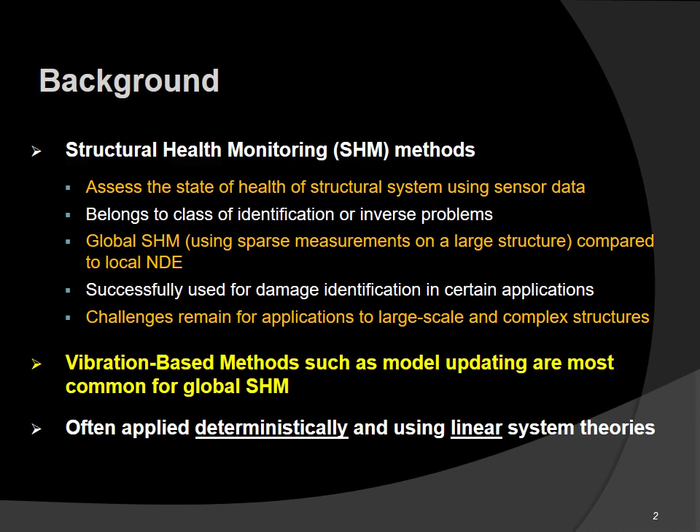One of the more common methods for SHM are vibration-based methods, and among the vibration-based methods, model updating has received more attention in recent years. However, this method is mostly applied in a deterministic manner using linear system theories.

In this presentation, I will give a brief introduction to model updating, and then I will show several applications to large-scale civil structures. Three of them are concrete buildings with masonry infills, and one of them is a footbridge at Tufts campus. The focus here is probabilistic model updating. I will not go over the nonlinear methods or ongoing projects in the interest of time.

The process of structural health monitoring includes collection of data, which is the first step, and we mostly deal with ambient vibration measurements. The second step would be identification, which is an inverse process, which in this case we use model updating. The next step would be performance assessment.

We use the predicted response time history as a metric for assessment of the performance, and we do not go into decision making in this presentation.

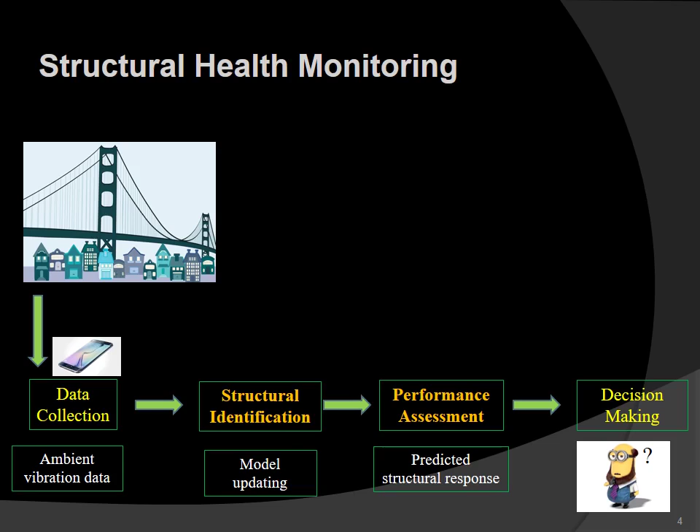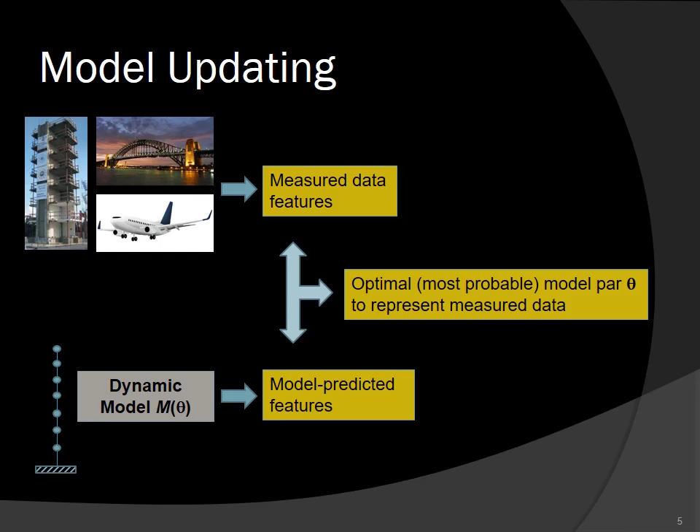Model updating is the process of tuning parameters of model M shown below, so the data from the model match those measured. This can be done through an optimization in a deterministic approach or through sampling in a probabilistic approach.

The challenges for vibration-based methods such as model updating is that they are sensitive to ambient and environmental conditions such as loading and air temperature. Therefore, it's good to have specialized probabilistic methods that can account for these sources of uncertainty explicitly, which is the topic of this presentation.

The other challenge, which we will not address in this presentation, is that most of these methods are linear methods relying on low amplitude vibrations, while some of the changes in dynamic properties may not be visible in the low amplitude vibration data.

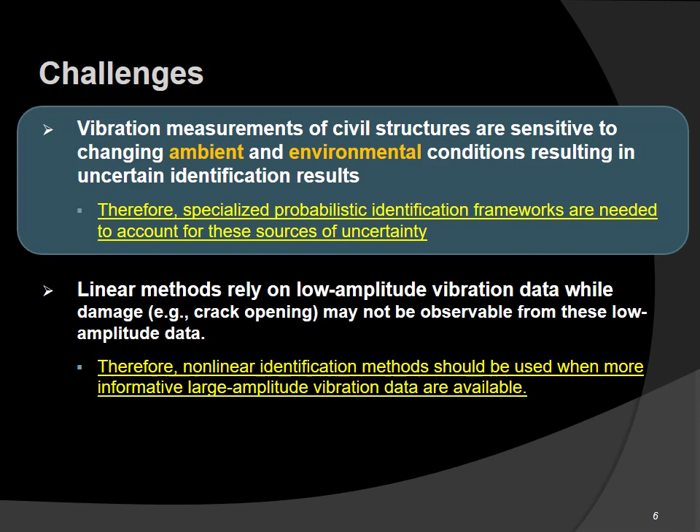The probabilistic methods can be categorized into Bayesian or frequentist approaches. The Bayesian approaches basically measure probability as a degree of belief. They assume that all of the uncertainties are epistemic. When you collect more data, this uncertainty will be reduced.

On the other hand, frequentists consider certain types of uncertainties are very complex and we cannot treat them as epistemic. Therefore, they believe probability measures a proportion of outcomes. The example of flipping a coin is a frequentist approach: you get a bag of coins, you throw the bag on the ground, and count the heads and tails. The Bayesian approach is that you flip a coin, you give me more information about the force that you flip, the ground information, the height, and I can give you more confidence level on the outcome.

The first application I'm going to discuss here is a two-story building in El Centro, California. As you can see in the timeline here, the building went through 4 major earthquakes, and after the last one, it was tagged as unsafe and scheduled for demolition.

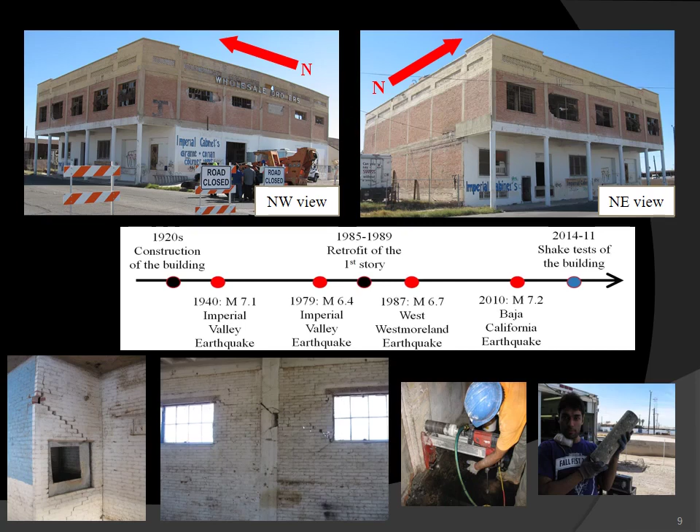Through an NSF grant with my colleague, Professor Stavridis at University at Buffalo, we performed certain tests on this building and collected vibration measurements.

The building was instrumented with triaxial accelerometers. As you can see, there are 5 of those at each floor on the floor plan. We had a shaker at the northwest side, and we also had LiDAR measurements that a colleague from University of Nebraska, Professor Wood, and his team, they collected.

We had more than 8 hours of ambient measurements. What we use here is 300 minutes at the reference state and 107 minutes at the damage states, and we broke it into windows of 10-minute data. So that gives us 30 sets of data for reference and 10 sets of data for the damage state.

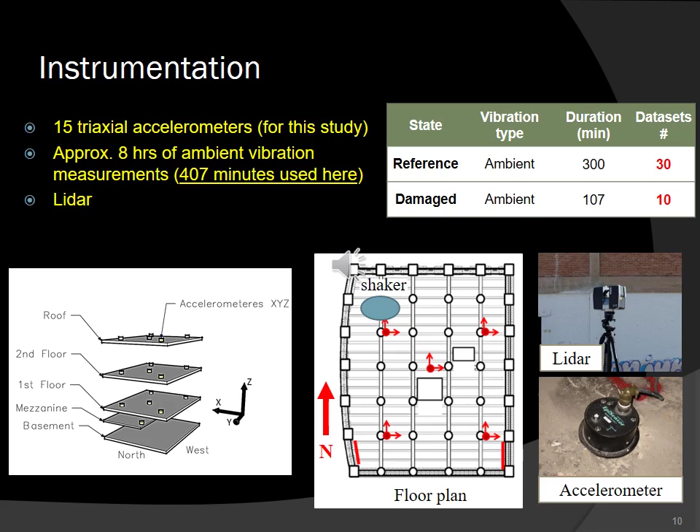But what is the induced damage on the building? The building was already severely damaged, but we're not talking about that damage identification. We can work on that too, but the focus is to be able to estimate the damage that we induced.

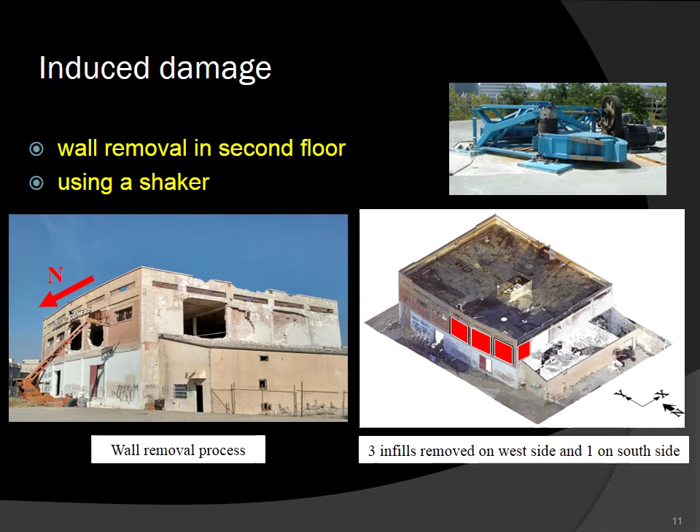In the bottom plot on the right-hand side, there are 4 walls marked with red. Those 4 walls were removed using a forklift, as shown on the left plot. We also used a large shaker, an eccentric mass shaker from NEES at UCLA, that we put on the second floor, northwest side, and the shaking was strong enough to cause some additional damage.

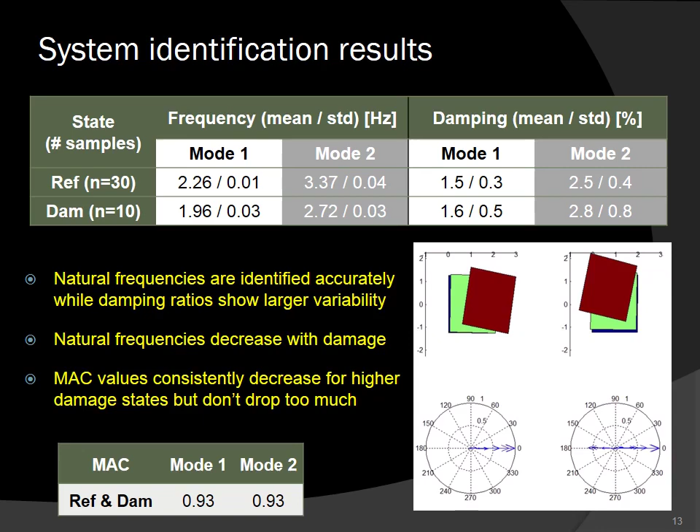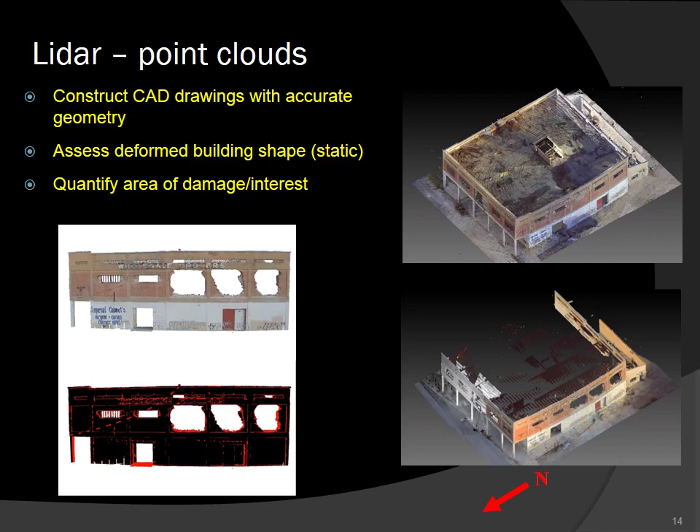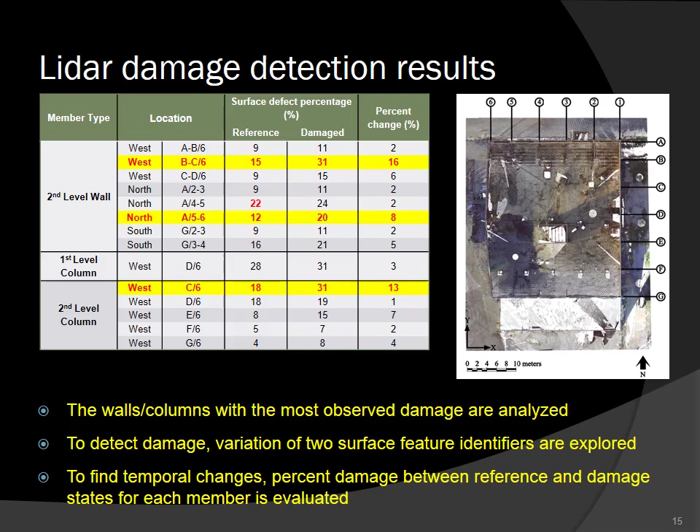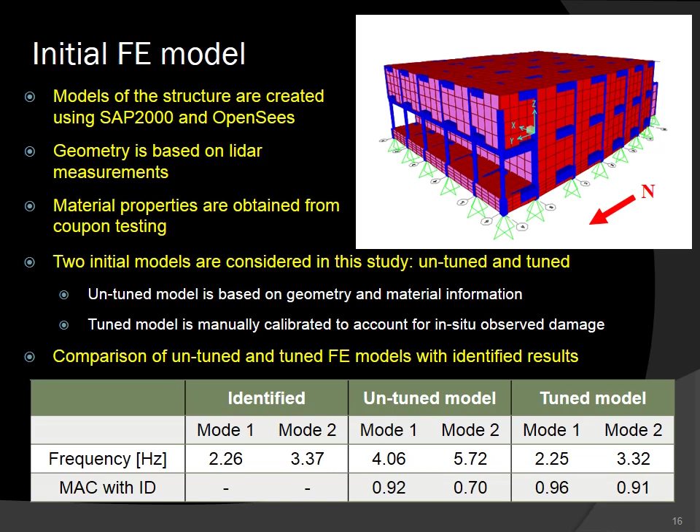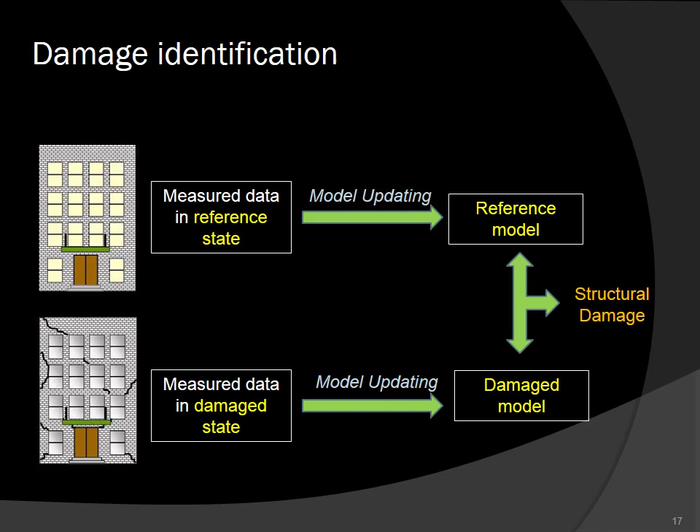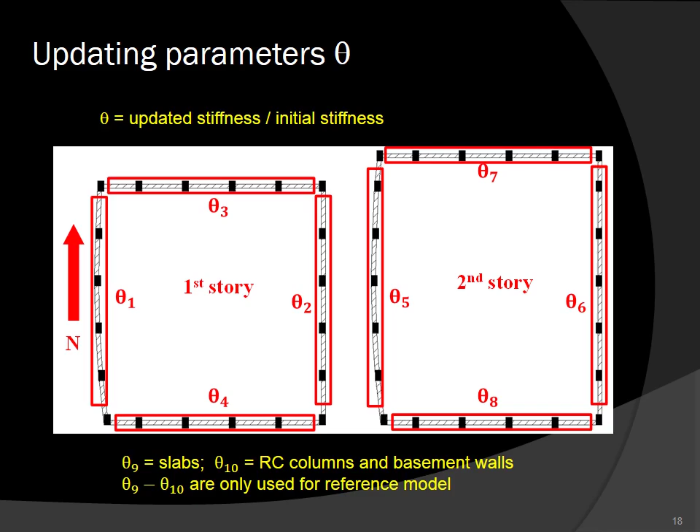In this application, we considered 10 updating parameters, all corresponding to stiffness of different components. The first 4 parameters are stiffness of the exterior walls on the first story, theta 1 being on the west side, 2 on the east side, 3 north, and 4 south. 5 to 8 correspond to similar directions in the second story. 9 and 10 are only used for the reference model and correspond to slabs and RC columns and basement walls, respectively.

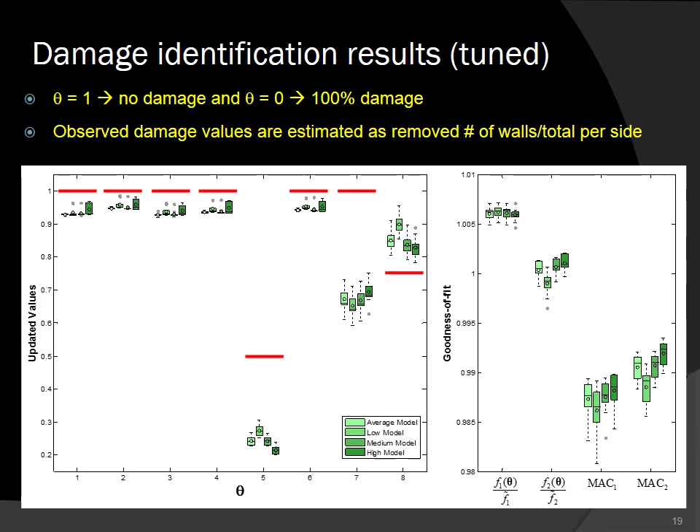5 and 7 correspond to north and west walls, which are exactly closest to the location of the shaker. So the extra damage is induced by the shaker and is consistent with north and west of the second floor, which was observed by LiDAR measurements, showing good consistency between LiDAR and vibration measurements.

In summary, overall, the damage identification results are accurate with small variability and represent the expected damage. There is some overestimation of damage, which we expect to be real and caused by shaking, and this is consistent with LiDAR.

The small variability I mentioned corresponds to the variability across different data sets, which are all ambient vibration. However, if we use forced vibration measurements, the variability would be very significant. So it is recommended that when we use linear model updating, we use similar amplitude data for both reference and damage states.

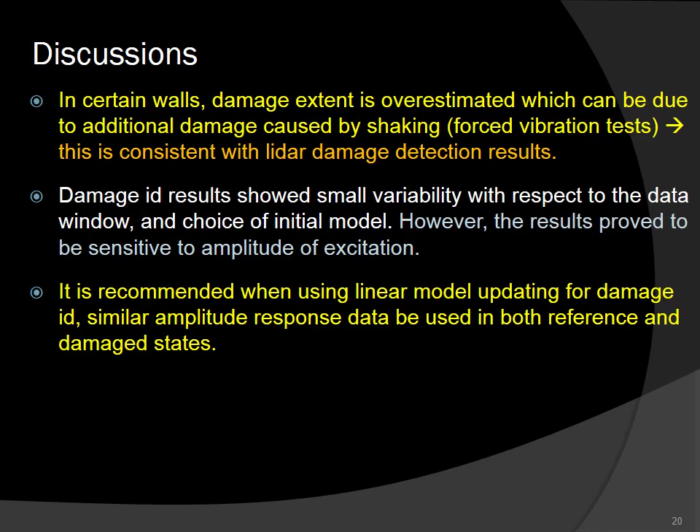The next application is also on a reinforced concrete building with masonry infills. This building is a 4-story school in Nepal, and the measurements are post-Gorkha earthquake.

The main shock of the 2015 Gorkha earthquake happened on April 25 of 2015 with a magnitude of 7.8. The epicenter was close to Kathmandu, the capital of Nepal, and the main shock was followed by 400 aftershocks with magnitude greater than 4.0.

One of these aftershocks was on May 12 with a magnitude of 7.3. The series of main shock and aftershocks caused more than 500,000 buildings to be damaged beyond repair and caused a lot of fatalities and injuries.

Our team visited Nepal in June of 2015, and a couple more visits that I'll focus only on this visit and one school building that I mentioned.

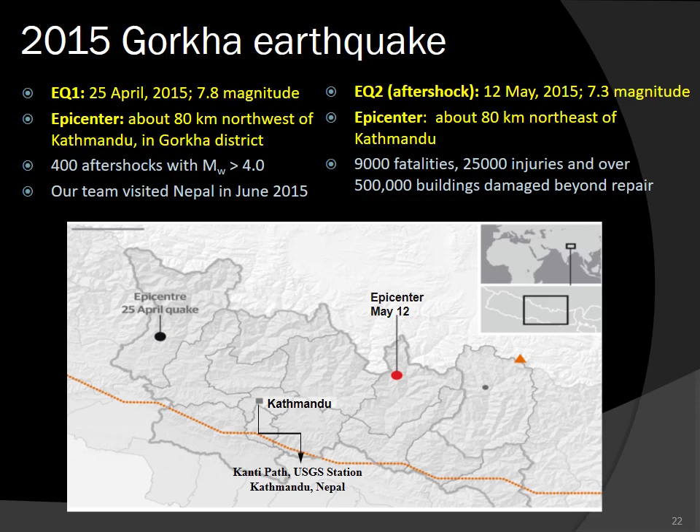The considered school building is located in Sanghu, close to Kathmandu, and is a 4-story reinforced concrete frame with masonry infills. You can see the plan of the building and the location of sensors on each floor.

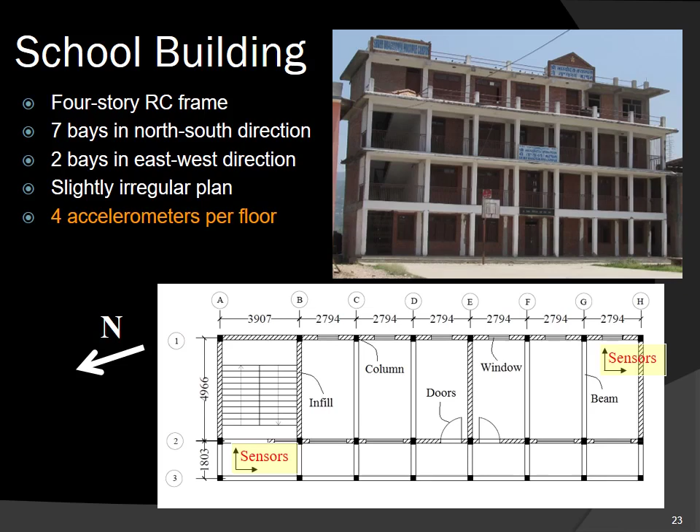The plan view of this school building is slightly irregular with the staircase on the left side, and the infills are not evenly distributed. That caused a little bit of torsion to begin with for the response, but what we observed, and this was a common theme in Nepal, was that a little bit of irregularity will cause significant damage on one side of the building. This is similar to what we saw in this building.

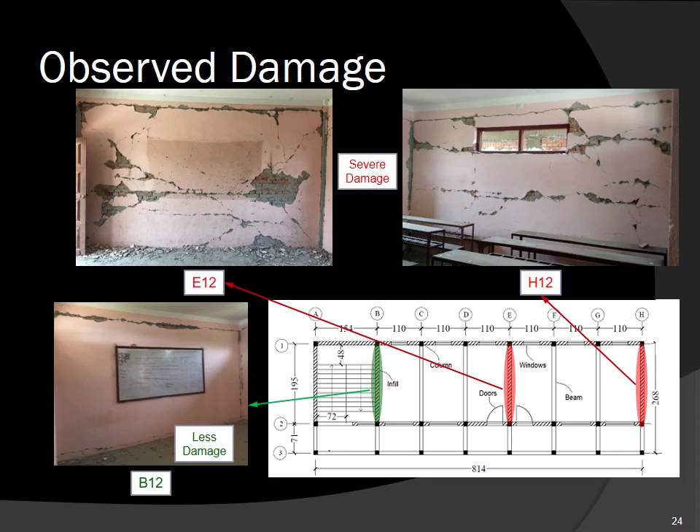You can see the walls marked with red are severely damaged, while the walls with green, which are on the left-hand side, are not damaged at all. So we concluded that there was significant torsional motion due to the earthquake.

This slide shows the response of the building to the main shock and the largest aftershock. You can see the two input excitations following one another on both north-south and east-west axes, so this is a biaxial, bidirectional excitation.

And you can see the plan view of the building, and the motion verifies our assumption of torsional motion, with much larger deformation on the south side of the building. This is a nonlinear model which was calibrated. It's outside the scope of this presentation and was prepared by our colleagues at University at Buffalo.

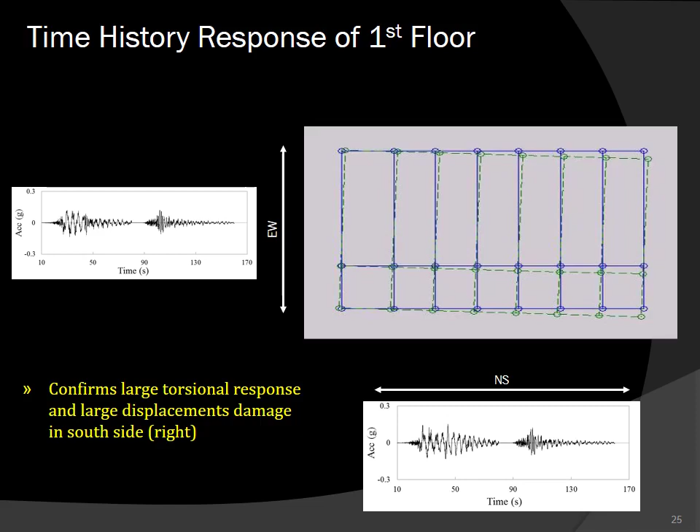The initial model for the purpose of model updating was developed in OpenSees, and we only cared about the linear portion of the model, or the initial tangent stiffness. Frame elements were used for the reinforced concrete frame, and strut elements were used for the infills.

You can see the drawing of the finite element model on the right hand side, and on the left hand side it shows the elements we removed from the finite element model based on the inspection of the building. The walls that have crosses on them mean we expected no remaining capacity or stiffness, so for the columns that are crossed out.

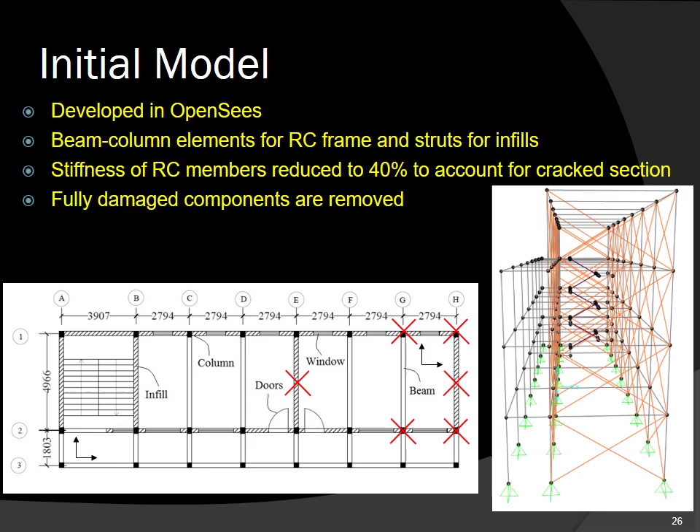Here we can see a comparison between the finite element model parameters and those identified from measurements. We can see that the identified natural frequencies are close to those of the model, except for the second mode, which has 25% error. The MAC values, which compare the mode shape vectors, are also pretty high, close to 1.

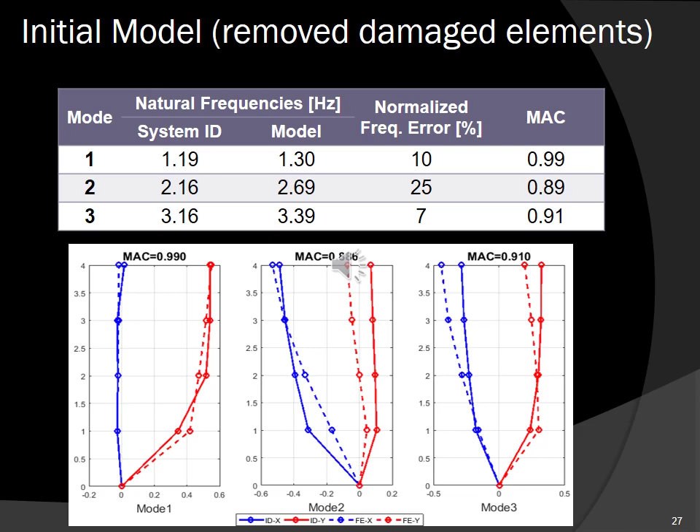In this study, we performed model updating of the initial model to match the identified model parameters. The considered objective function is the difference between natural frequencies and mode shapes, as well as a regularization term in the deterministic approach, and corresponding to that, we considered a similar prior and similar likelihood function. So we performed both deterministic and Bayesian model updating.

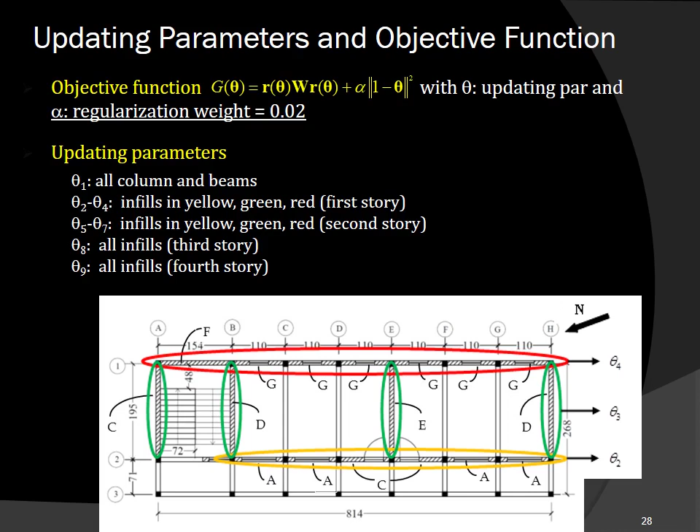For the first story, for example, theta 2 and theta 4 are the walls in the long direction, or north-south direction, which we did not consider any reduction for in our initial model. So we expect theta 2 and theta 4 to get reduced because of the cracks we observed, but we didn't implement that in the model.

As I mentioned in the previous slide, theta 2 and theta 4 are the elements that we suspected had damage. We observed some cracks, but not as much as the other elements that we completely removed. You can see that both deterministic results and Bayesian results provide significant loss of stiffness in theta 2 and theta 4, with the smallest uncertainty for these two damaged elements. The uncertainties in the Bayesian values are in parentheses.

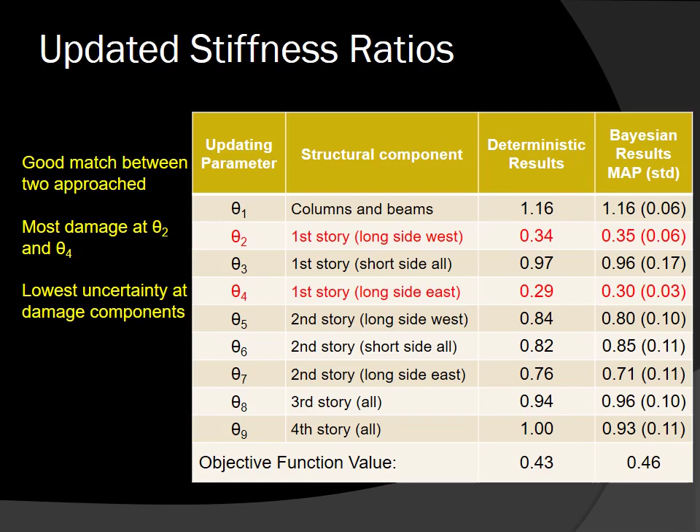Theta 5 corresponds to a wall in the higher floors, which is not as sensitive, therefore has larger uncertainty. The average value seems to be around 0.85, and the uncertainty, as you can see, is much larger than that of theta 4.

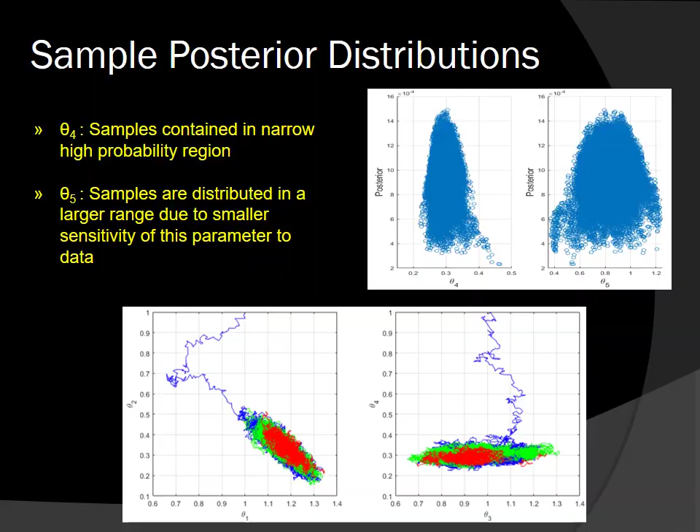In summary, we were successful in performing performance assessment of the buildings we visited using just post-earthquake ambient measurements, of course, combined with accurate initial finite element models.

In the specific application I showed you, we found that the most probable values of the estimated model parameters are very consistent with those obtained from a deterministic optimization. We found the results to be sensitive to the choices of updating model parameters, residuals, and most importantly, the prior information or the regularization term.

We were happy to see that the damaged elements in the first floor were identified with the most confidence level, or lowest uncertainty, and these damaged elements match what we saw in the actual building. We also performed a second case of identification, which was actually the first case that we did without removing the damaged elements.

In that case, we had more updating parameters. It was more computationally expensive, but the updating results clearly indicated that there is no remaining stiffness in the elements that we already removed.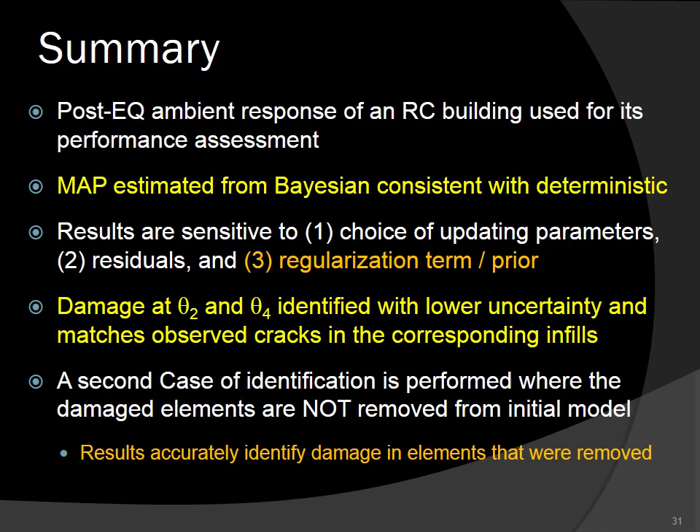In this section, I will review a hierarchical Bayesian model updating approach where we can consider different sources of uncertainty in the updating scheme.

The motivation for the proposed hierarchical Bayesian model updating is that the sources of uncertainty, specifically for civil infrastructure, can be categorized into two. One of them is parameter estimation uncertainty, such as measurement noise or identification error, which are considered epistemic. You add more data, these sources of uncertainty always reduce, and you can get up to zero variability because of these sources. Then you have the second source of uncertainty, which is the actual valid variation of the physical properties of the system, such as changes in mass.

For example, in a building or a bridge, due to traffic or occupancy, you have some changes in mass. Or because of the temperature change, you have stiffness changing. Or the effective stiffness changes due to the ambient loading.

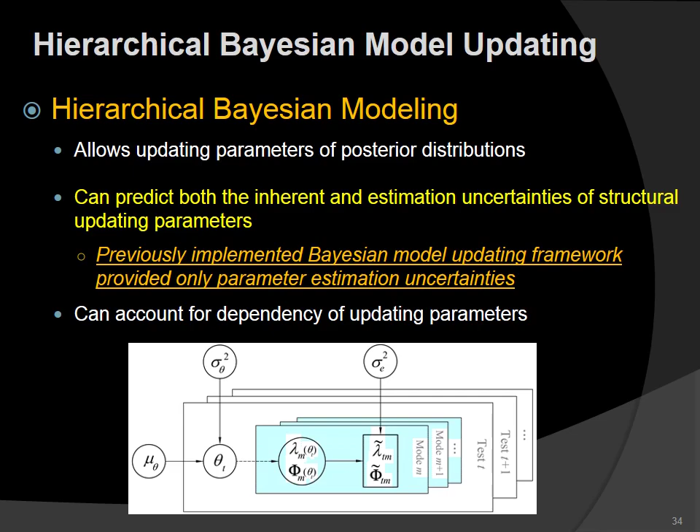So as I mentioned, we assume theta, which is our stiffness parameter, follows a known distribution such as normal or log normal, and we can change that as we perform the updating, with unknown parameters mu and sigma, which are our hyperparameters, and we are interested to update.

You can write the Bayes formula. It has the likelihood, prior, as well as hyper-prior terms. And the error function, as in previous studies, is the difference between eigenproperties, or natural frequencies and mode shapes.

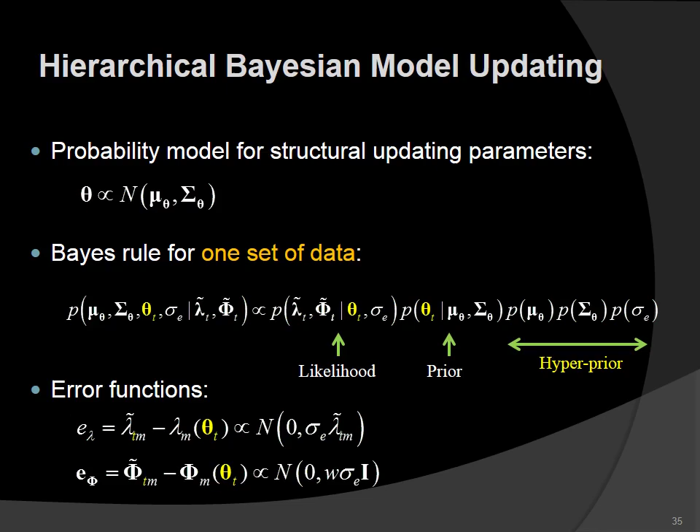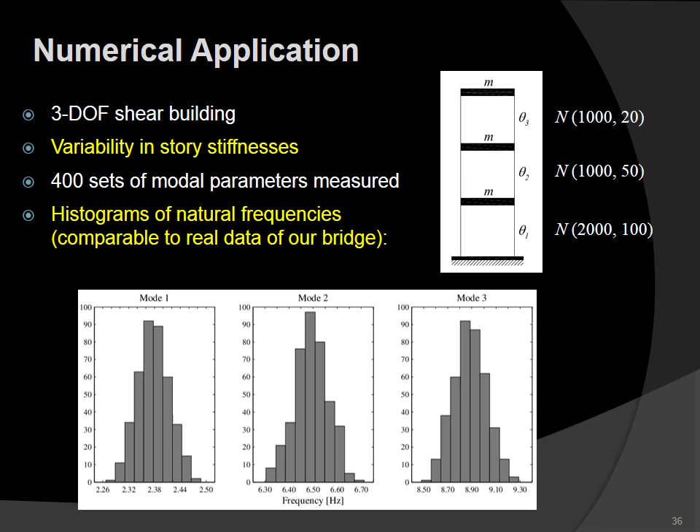Here you can see the results for increasing number of measurements. Different lines correspond to 5, 20, 50, and 400 data points. And the line that has a dot going through it is the exact underlying distribution.

You can see that once we have more than 5 data points, the distributions tend to converge to the exact values. However, note that while you don't see much difference here between 50 and 400, because these are the most likely values of mean and standard deviation used for these plots, the estimation uncertainty of mu hat and sigma hat reduces as we increase the data, which is not shown here.

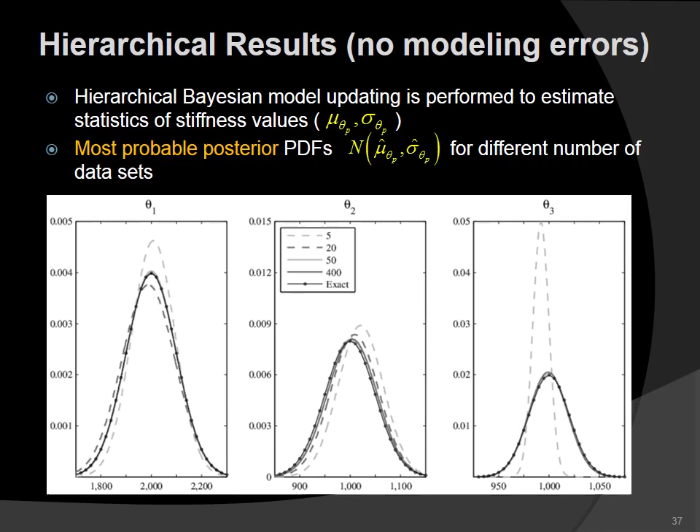This slide shows the results of the same problem of model updating when we don't use hierarchical Bayesian, but a classical Bayesian approach. In other words, classical Bayesian model updating does not consider an underlying distribution for model parameters or inherent variability. Therefore, as you increase the number of data points from 5 to 50 to 400, the estimation uncertainty decreases, meaning how certain the method is that 2000, 1000, and 1000 are the best choices for theta 1, theta 2, and theta 3 respectively, which is suitable for many cases of application.

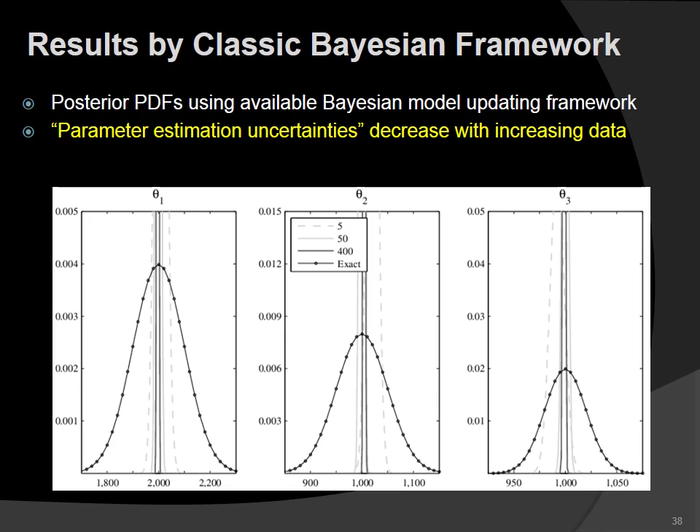However, it is not suitable when we want to estimate the uncertainty or variability corresponding to the underlying or actual physics-based variability of updating parameters. In summary, the hierarchical framework is suitable when there is inherent or underlying uncertainty for model updating parameters, and the results are consistent with those from the frequentist approach.

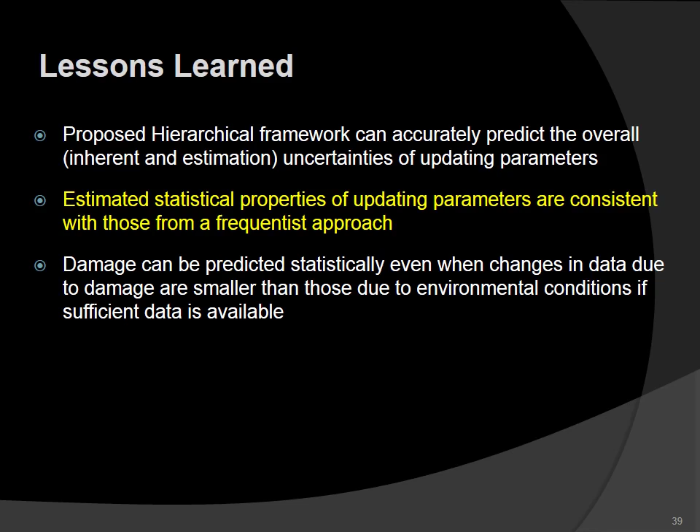The next considered application case study is a 10-story building in Utica, upstate New York, which is a concrete building with masonry infills.

A hierarchical Bayesian model updating approach is implemented here for model updating, and in this application, the error function is assumed to be the difference between eigenvalues and mode shapes of the model and those from the data. And we have 50 sets of data.

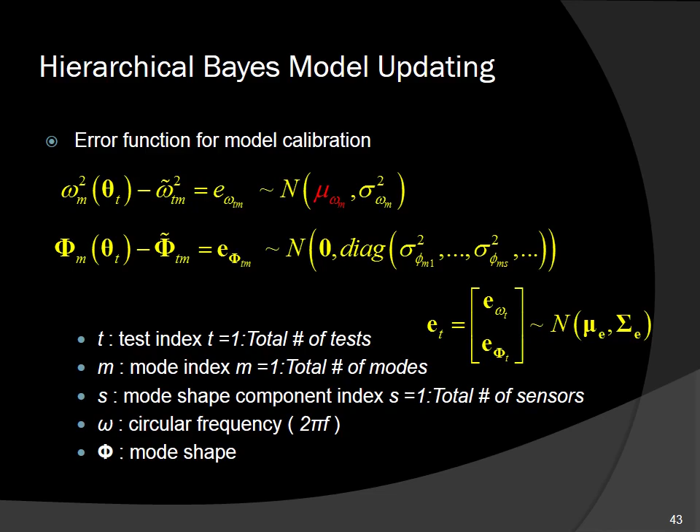An initial finite element model of the building was created in SAP 2000 using strut elements for infills, frame elements for beams and columns, and shell elements for slabs.

The model was reduced to a reduced order model for the hierarchical Bayesian model updating.

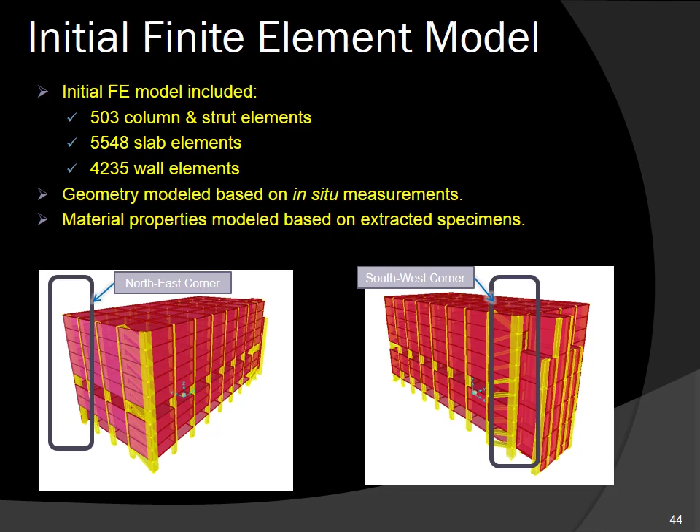The natural frequencies and mode shapes of the first 3 identified modes are shown here. As you can see, the first mode is mainly a translational mode, while the second and third modes are torsional.

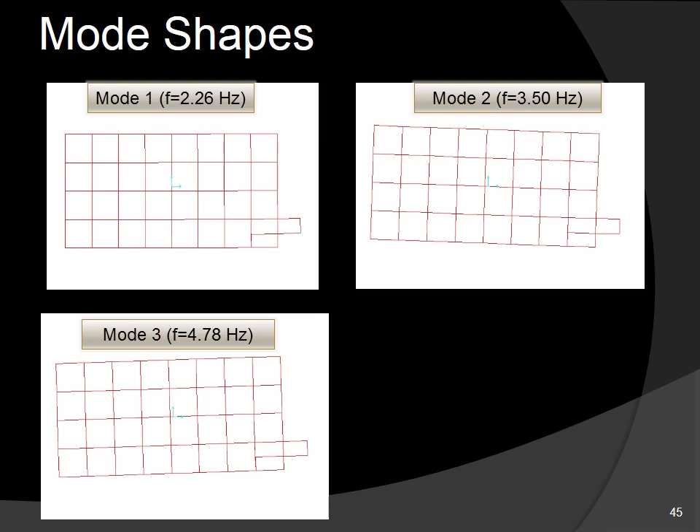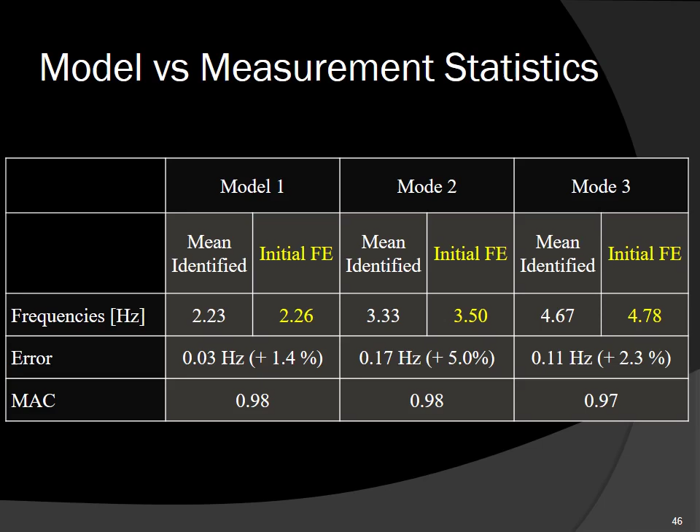In this table, we can see a comparison of the modal parameters from the finite element model and those identified. Note that the mean value of the identified values over more than 300 datasets is only reported here. You can see that the initial model matches very accurately the mean of the identified values, and that's because the initial model was mildly tuned to match the identified results. However, the tuning has not been done through an optimization process.

The hierarchical Bayesian finite element model updating approach is implemented here to calibrate 2 structural parameters, which are the effective stiffness of concrete walls as theta1 and that of concrete slabs as theta2. And that's it, we have 2 structural updating parameters.

However, we update the parameters of these 2 Young's moduli as mean and covariance matrices in the hierarchical approach, as well as the modeling error properties. One novelty in this application is that we do not necessarily consider the error functions to be zero mean. As you can see, we consider 3 cases of calibration.

In the first case, we consider zero mean error functions. In the second case, just one of the error functions, which we observed clear bias, and that is for the third modal frequency, is also updated as non-zero mean. In case 3, 2 of the modal frequencies are considered non-zero. Therefore, mu of omega 2 and mu of omega 3 are updated.

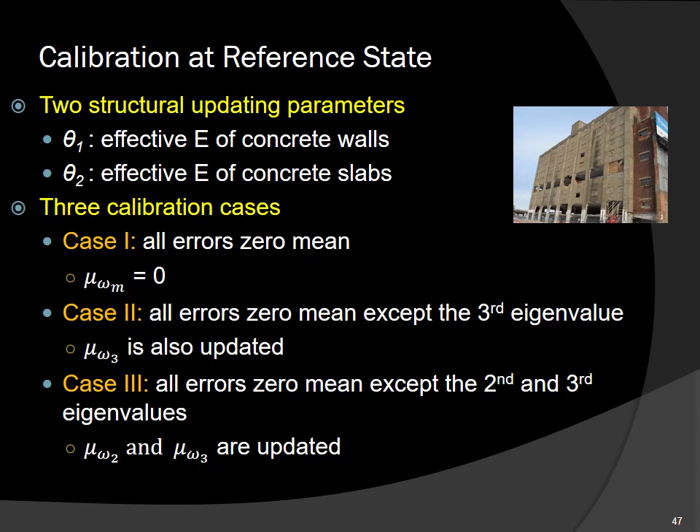The calibrated model is used to probabilistically predict the response of the structure. The response can be the time history response due to a known input excitation, or it can be modal properties. Here we are looking at the modal frequencies for the first 3 modes.

The prediction will have two parts. The first part would be considering the variability in the updated structural parameters, theta. Therefore, the variability of theta comes from mu of theta and the covariance matrix. And the second part would be coming from the modeling error, which explicitly accounts for the bias or the estimated mean of the error function.

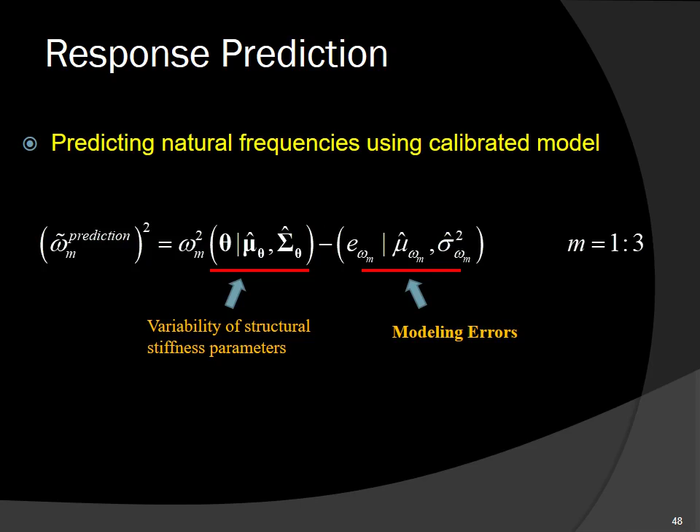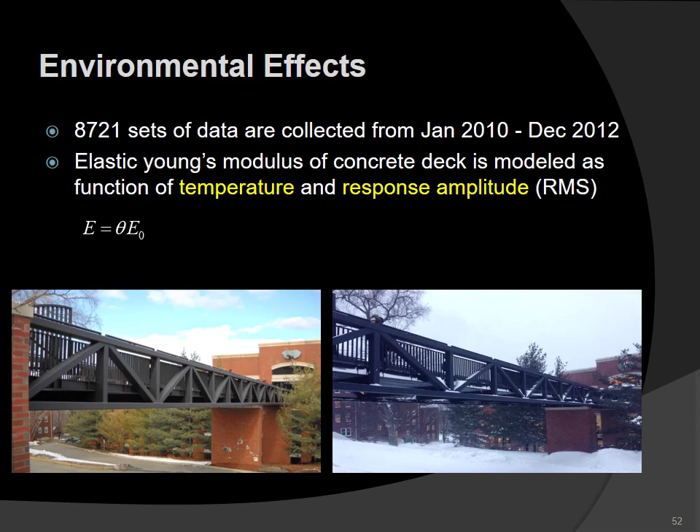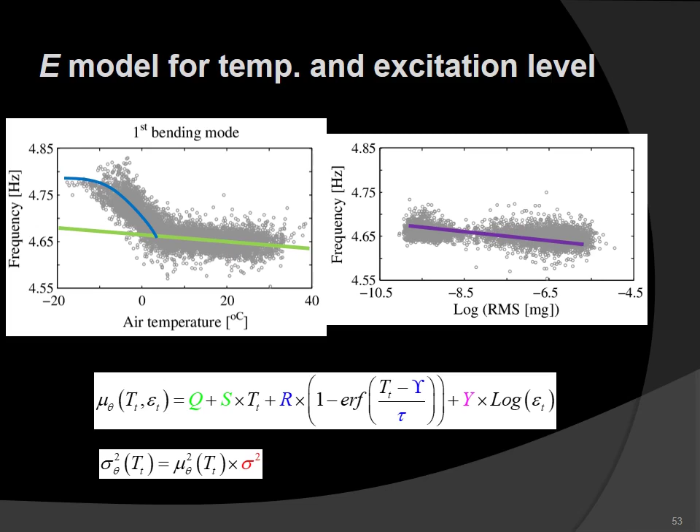This is what we can do at the hierarchical Bayesian updating. This is hierarchical level 2. In hierarchical level 1, I only update parameters of my stiffness, which are mu and sigma. In hierarchical level 2, I consider parameters for those mu and sigma. So I update the parameters of updating parameters, which are Q, S, R, Y, and tau, and sigma, of course, in the second equation.

Here we can see a graphical representation of the hierarchical model updating. You can see all of the parameters that go into mu of theta and sigma of theta, and then from those we can get a distribution for our theta, and every observation of the modal parameters is one sample observation from theta basically.

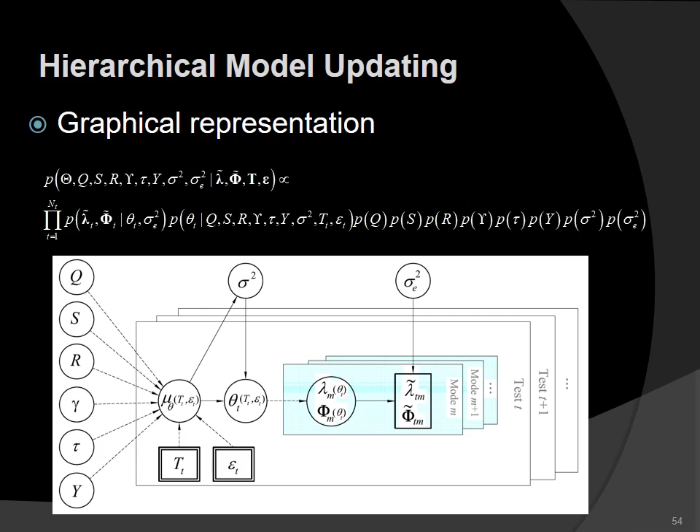The hyperparameters are estimated through stochastic simulation. Here a Metropolis Hastings within Gibbs sampler is used. You can see the distribution of estimated parameters, all of the hyperparameters, Q, S, R, upsilon, tau, Y, sigma - they have very tight distributions. So the uncertainty of those parameters is negligible, which is good, meaning we have enough data.

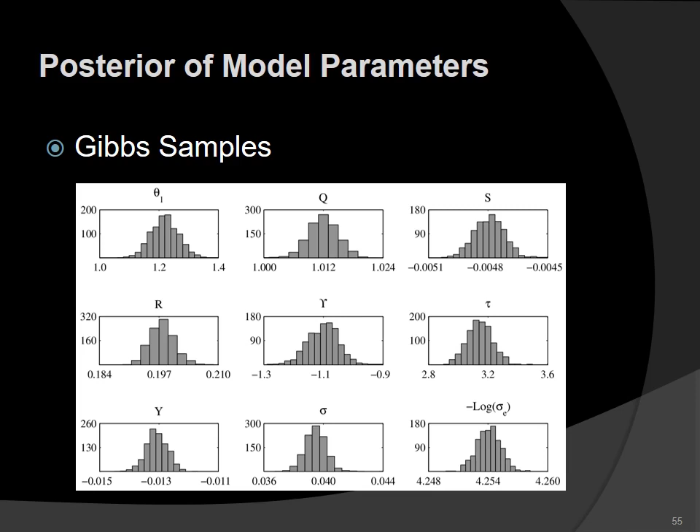Here we can see the estimated mu and sigma of theta as a function of temperature, for example, and excitation level. So if we consider the first level of hierarchical updating, which only considers modal parameters and does not use temperature measurements or amplitude of excitation, the mean would be constant.

The coefficient of variation, COV, on the right plot would have to be larger to compensate for that. However, if we consider the blue case, where we consider temperature as well, you see the mean would change with temperature, and the coefficient of variation of the modeling parameters, theta, would drastically reduce. It goes from 12% to around 4%.

Now, if we consider in addition to that the amplitude of excitation, as you can see in the left plot in low, medium, high, in the right plot you will have further reduction in the sigma - not significantly, maybe from 4% you go to 3.7% - which is another substantial reduction when you want to consider your decision making.

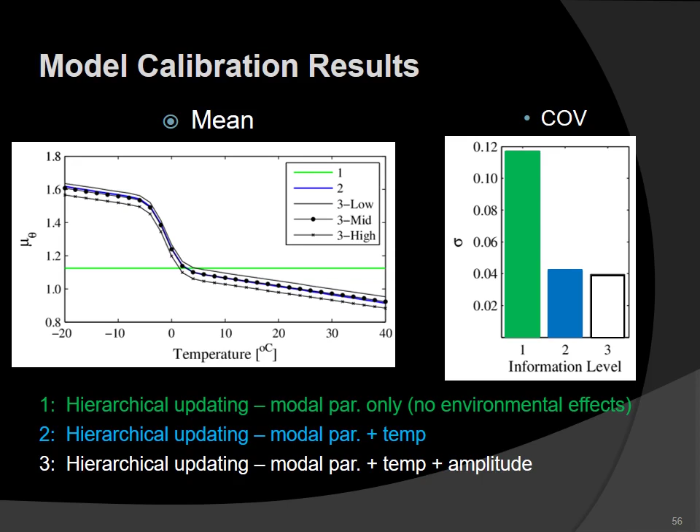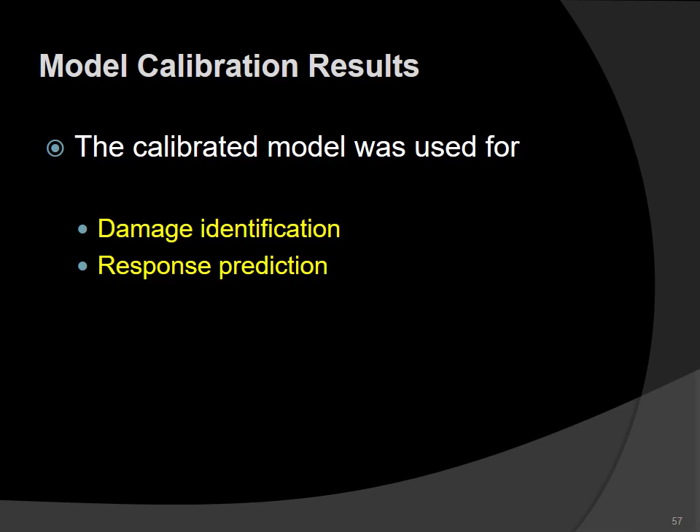The calibrated model was eventually used for response prediction and damage identification, which I skipped that part, and I show the response prediction in the previous application of the El Centro building in the next and final section of this presentation.

Here I go back to the two-story building in El Centro and we perform hierarchical Bayesian model updating level 2, where we consider the effects of amplitude of excitation specifically. If you remember in the Dowling-Hall footbridge, temperature had the largest effect. In this building, amplitude of excitation has a significant effect on the modeling parameters.

These two plots show the identified natural frequencies for the first two modes of the El Centro building at different stages of damage and different levels of excitation.

You can see at, for example, DS1, which is the focus of this study, the black dots vary a little bit, but the triangles and squares, which correspond to the shaker test, are significantly lower for both modes 1 and 2. That is not permanent damage, because you can see we do ambient excitation, ambient excitation, ambient excitation, and then we do a shaker, it drops down, and then goes back up after that, and it's at the same range, another drop when we do the shaker test, goes back up to where it was, until we have the permanent damage between damage state 1 and 2.

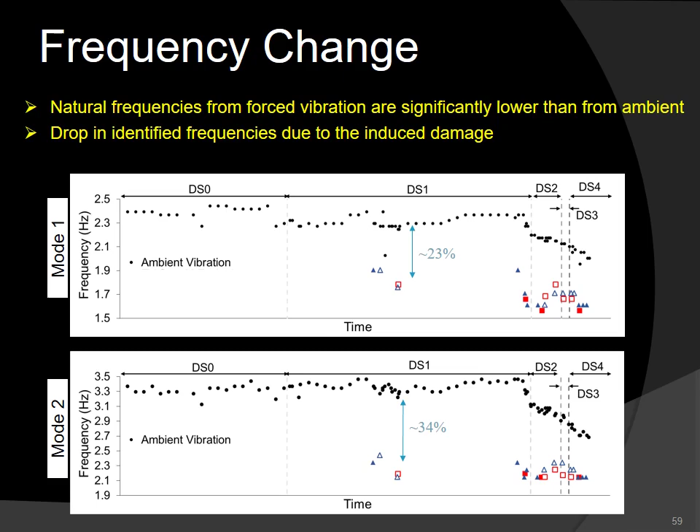So we look at only damage state 1, and from the previous plot, we put the identified natural frequencies for modes 1 and 2 as a function of vibration level. The previous plot is translated into vibration level versus frequency. You can see the stars for forced vibration and circles for ambient.

You can see close to vibration levels 0 for both modes, we have a cluster of circles which correspond to the ambient vibration levels because they seem negligible compared to forced excitations. For the forced excitations, the frequencies are decreased drastically, and they seem to be following a linear trend.

Based on this observation, we consider the stiffness mean for updating parameters to follow a linear function as a function of vibration level, which is the root mean square of one acceleration in x direction and one in y direction divided by 2, as shown in the equation in the slide.

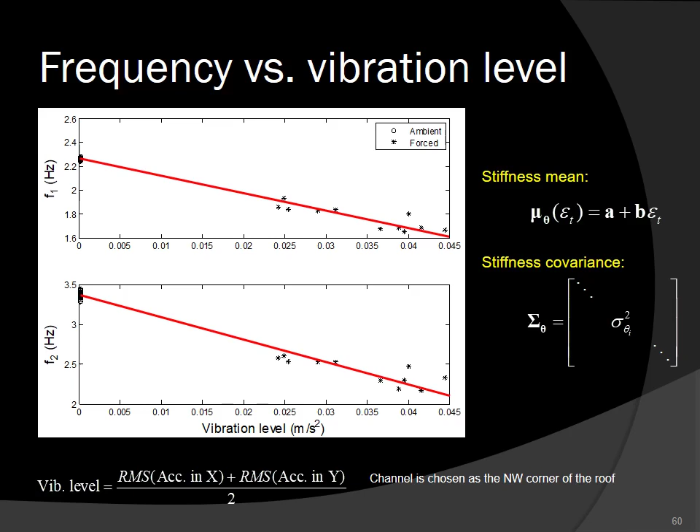In the deterministic approach, we just find the optimal values by minimizing the difference. In a classical Bayesian approach, we also estimate the estimation uncertainty of the updating parameters.

The hierarchical approach, however, we consider an underlying variability for updating parameters theta, and we estimate mu and sigma of those. In hierarchical level 2, we assume that mu and sigma follow a trend that is characterized by other parameters like parameters A and B here.

So we perform the hierarchical Bayesian model updating level 2 for this building, and the underlying updating parameters are assumed to follow a normal distribution where the mean and covariance matrices are updated. The error function is assumed to be zero mean here with the covariance estimated, and parameters A and B are estimated as well.

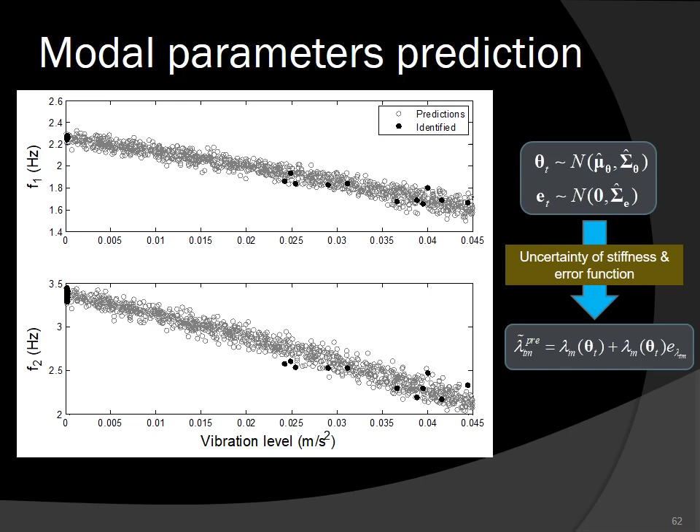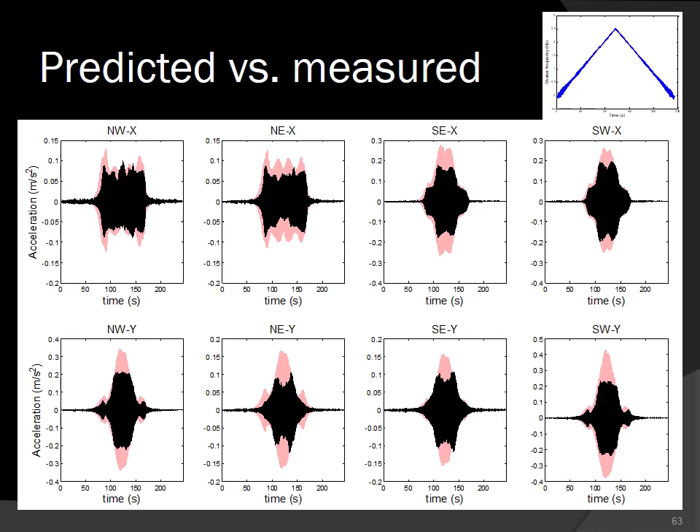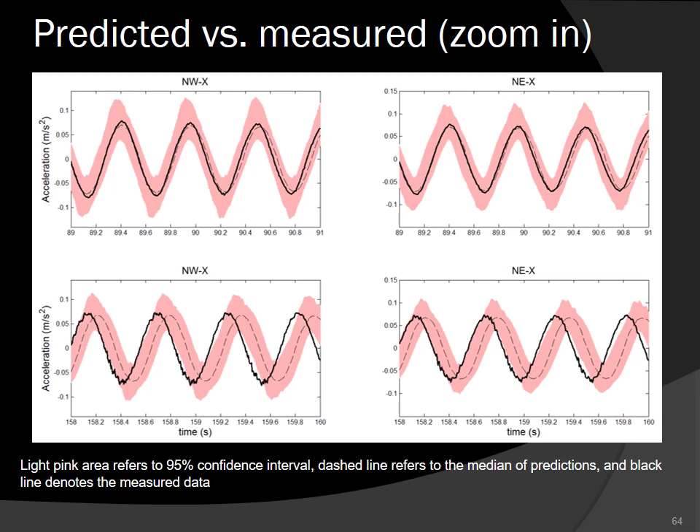Finally, I want to acknowledge the sources of support for this study and all the collaborators. This has been a collaborative project between many institutes and many people involved.